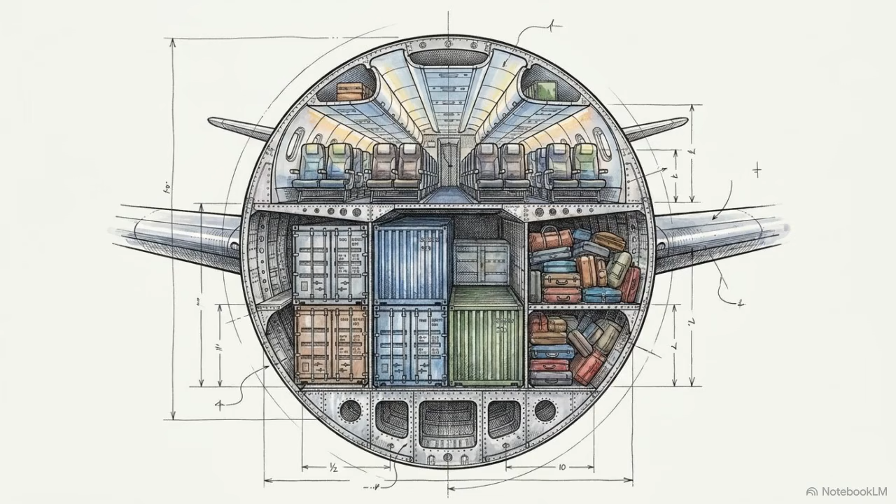In aerospace engineering, gravity is a strict accountant. Every kilogram added to an airframe subtracts directly from payload capacity or maximum range. When a commercial jet pulls off the tarmac, the materials it's made of dictate exactly how far it can go and what it can carry.

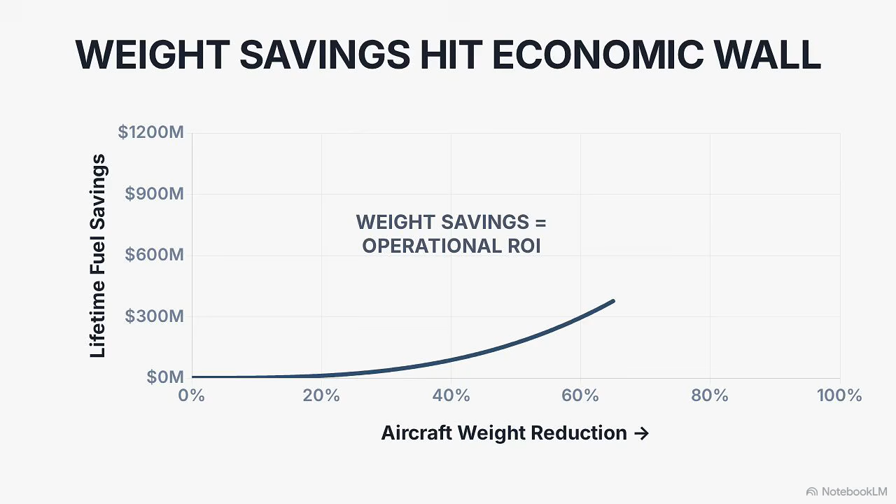This chart shows the exact economic formula driving all aviation design. As we reduce aircraft weight along the bottom axis, the lifetime fuel savings curve shoots upward. But there is a harsh reality waiting at the far right of this graph. If lighter is always better, why not build every plane out of the absolute lightest supermaterials?

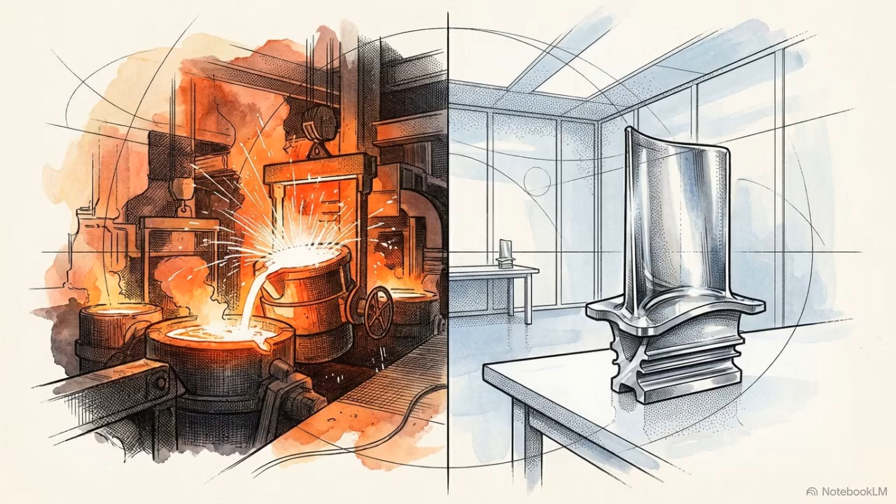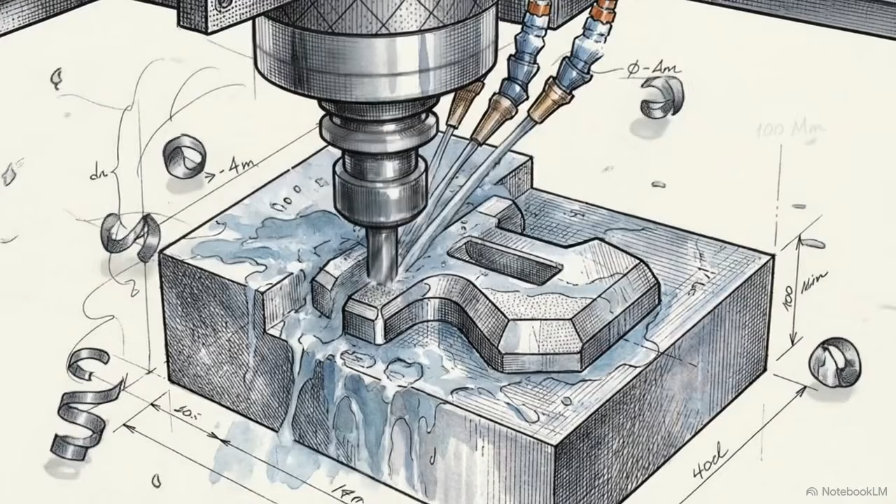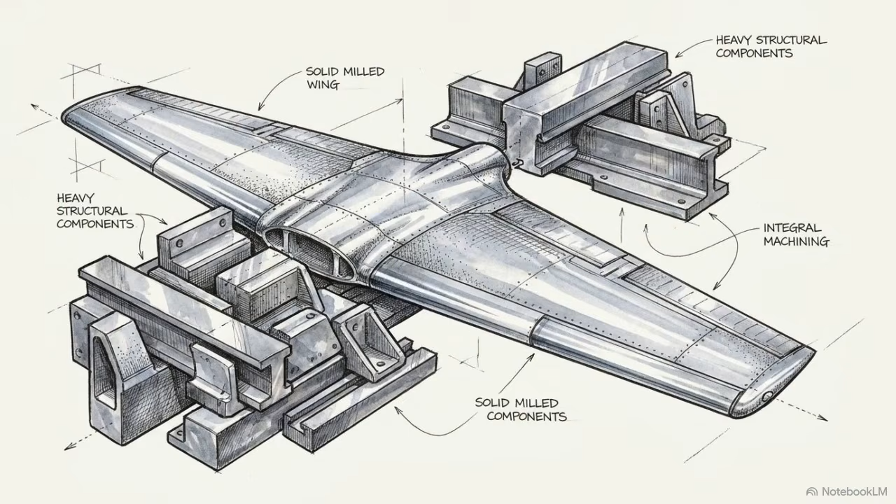The answer comes down to manufacturing reality. Material selection is a brutal, constant game of optimization. Engineers must balance the exact physical properties a part needs against the sheer cost of shaping, machining, and producing it at scale. When you look closely at modern aircraft structures, three specific heavyweights dominate this optimization game: aluminum, titanium, and advanced composites. Designing a successful, profitable airframe requires ignoring the search for a single, flawless supermaterial. It demands a highly strategic, mixed material portfolio, carefully placing each element exactly where it maximizes the life cycle return on investment.

For decades, the 2000 and 7000 series aluminum alloys have served as the highly reliable backbone of aerospace structural design. As you can see by the sheer scale of early assembly lines, we know exactly how to produce and work with it. These specific alloys offer a highly predictable strength-to-weight ratio. They are relatively light, quite strong, and crucially, the raw material is inexpensive to source and shape into complex geometries.

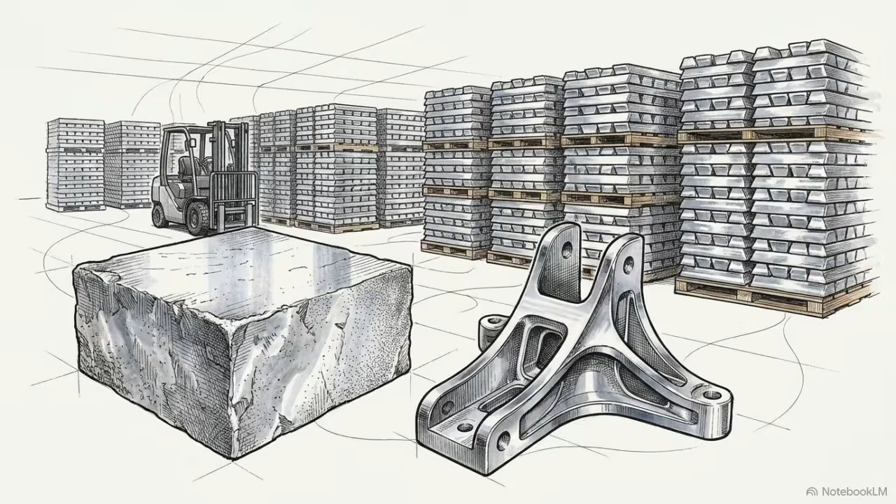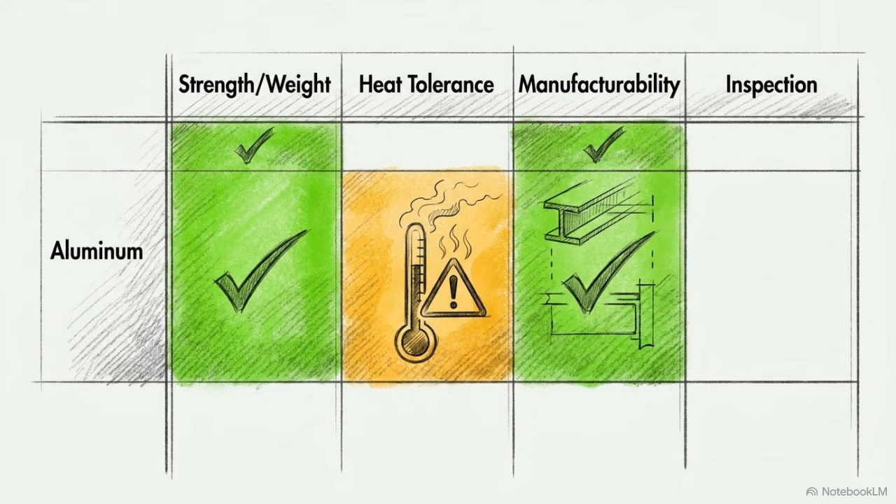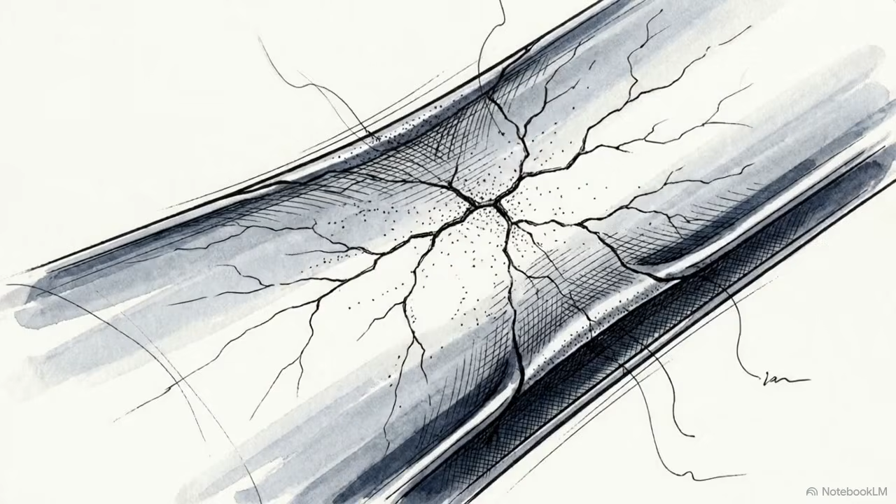This comparison matrix tracks how we evaluate material viability today. When we plot aluminum, it earns excellent marks for its reliable strength-to-weight ratio and its ease of manufacturability. However, aluminum has strict physical boundaries. If an aircraft component operates at elevated temperatures, like near an engine exhaust, aluminum rapidly loses its ability to retain structural strength. It also faces a long-term operational limit. Over thousands of pressurization cycles, aluminum structures inevitably develop fatigue cracking, requiring constant, rigorous visual inspection as the airframe ages.

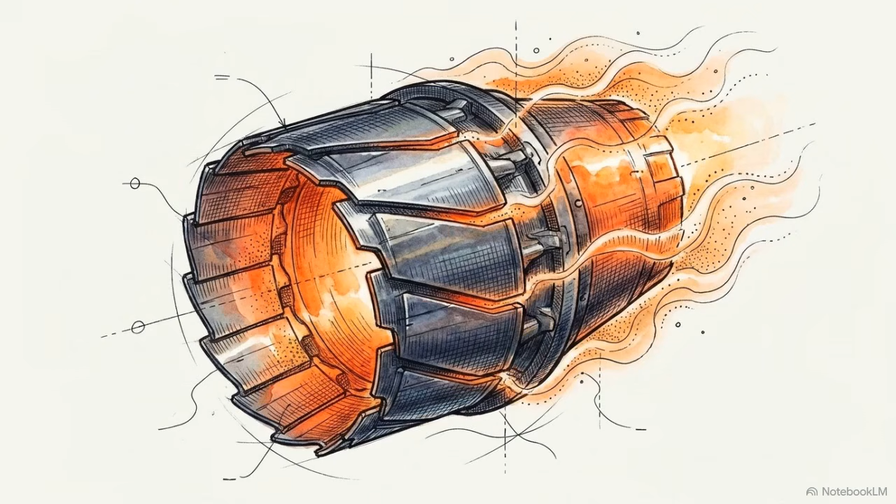When engineers encounter environments that exceed aluminum's thermal and physical limits, they deploy a highly specialized alternative: titanium. Titanium shines in extreme environments. It effortlessly survives the immense heat near jet engines, resists corrosion entirely, and delivers an elite structural density. On our matrix, its heat tolerance and strength profiles light up bright green.

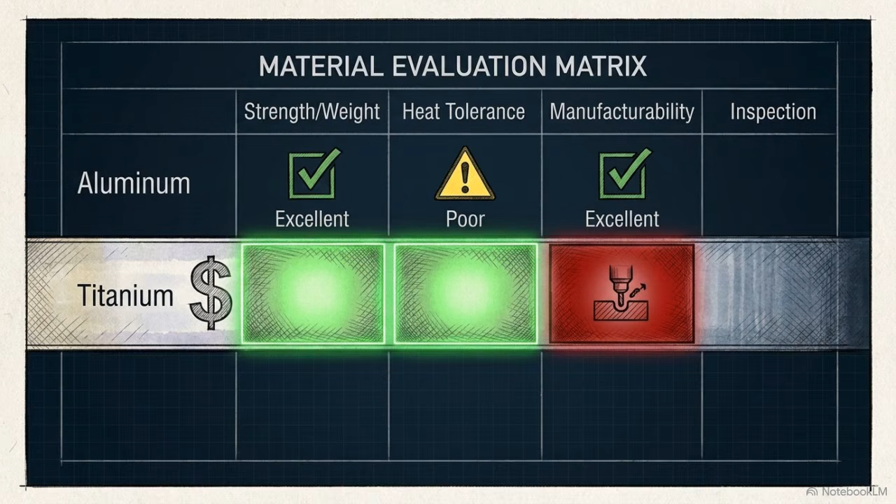That performance carries a steep economic penalty. The raw cost of titanium is astronomical, and its sheer toughness makes it notoriously difficult to machine, which drastically slows down production lines. Traditional metals provide a known, highly predictable baseline. We understand exactly how they behave, but their thermal ceilings and specific fatigue curves enforce a hard mathematical limit on how efficient an airframe can ultimately become.

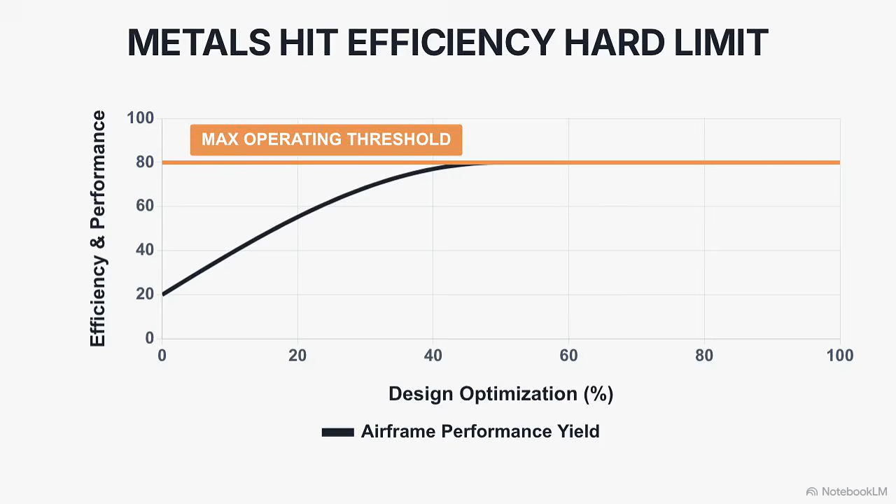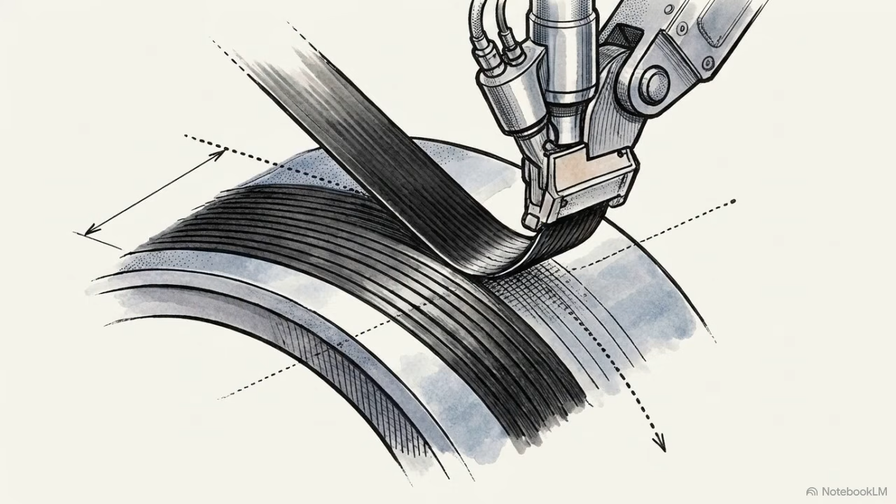To push past those metallic limits, modern structural design relies on carbon-fiber reinforced polymer, or CFRP. You often see it as the massive, unpainted green fuselage sections on modern assembly floors. Instead of pouring and machining a uniform metal, engineers lay down extreme strength carbon fibers in specific directions. If a wing bends upward during flight, they can align the fibers to provide strength exactly along that specific load path, shedding unnecessary weight everywhere else.

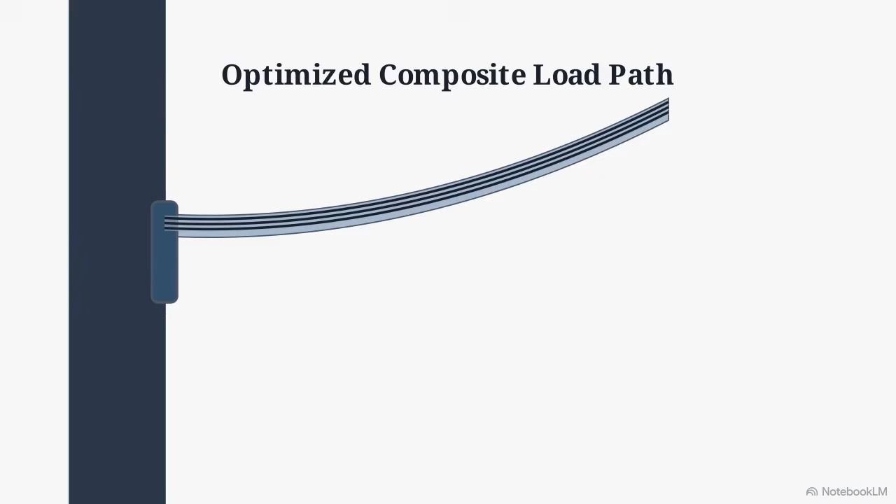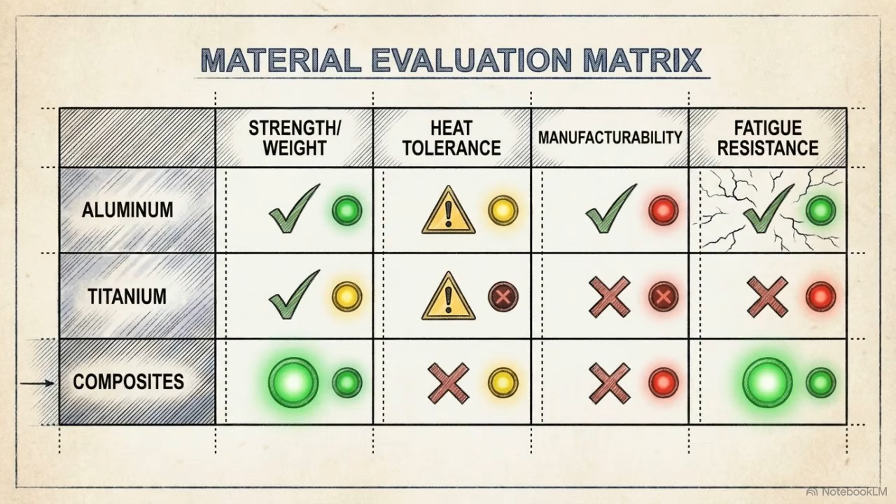Utilizing these composites in primary structures massively improves fatigue resistance. Because they are not metal, they simply do not experience the traditional crack propagation mechanisms that plague aging aluminum airframes.

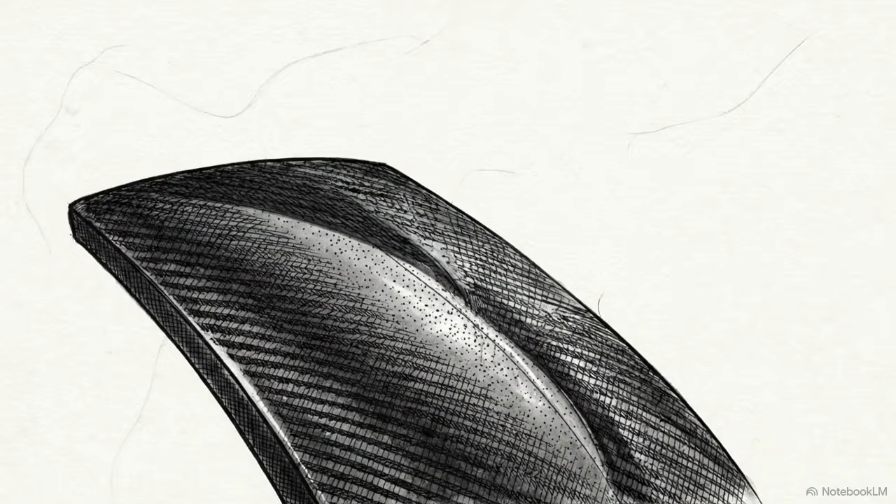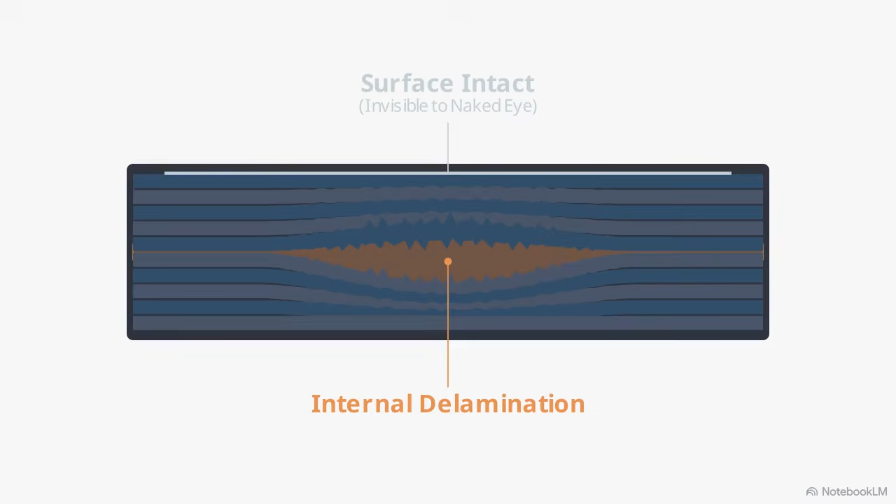But generating that strength requires a severe manufacturing bottleneck. The polymer resins that bind the carbon fibers together must be cured inside massive pressure vessels, holding immense, sustained heat for hours. Composites also hide their wear and tear. A dropped tool or a bird strike might leave the surface looking perfectly smooth, while causing deep structural delamination entirely invisible to the naked eye. This forces operators to rely on specialized non-destructive testing, like ultrasonic inspection, to verify the part's integrity. It's a heavy burden on both the manufacturing floor and the maintenance schedule.

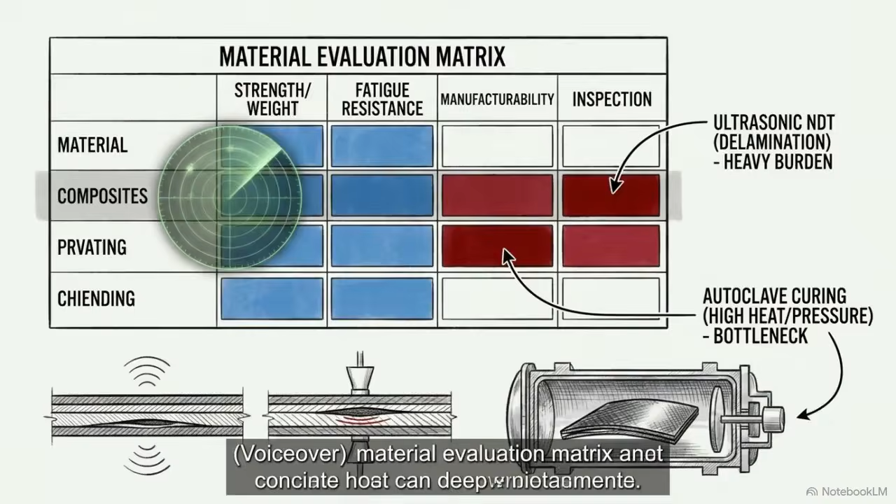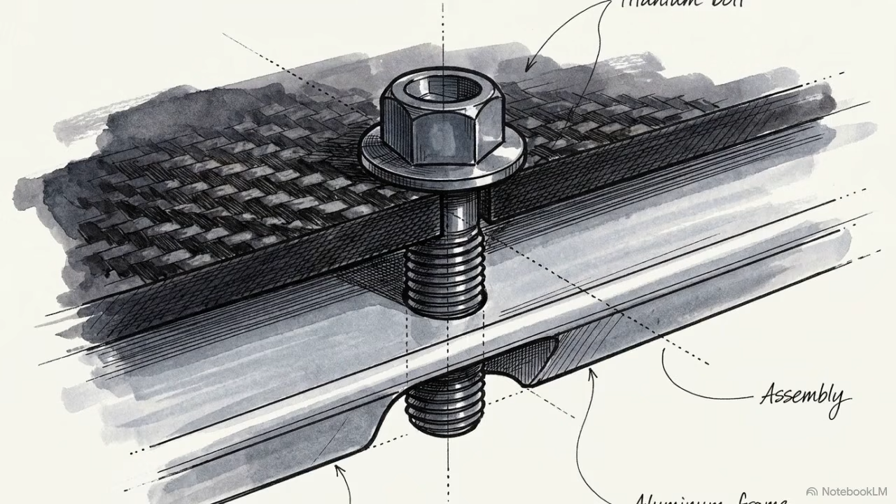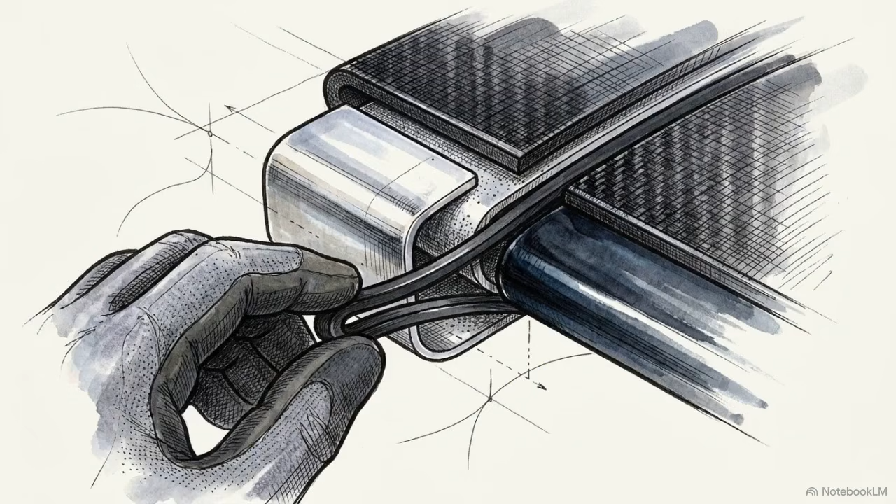Because of these costs, no commercial aircraft is built purely from one material. We combine metals and composites to balance the budget. But joining these materials creates a severe interface hazard. If you bolt aluminum directly to a carbon fiber panel, differing electrical potentials trigger rapid galvanic corrosion, aggressively eating away at the metal. Engineers spend considerable time mitigating this exact risk, designing complex isolation layers, creating physical barriers, and specialized coatings for every single junction point where dissimilar materials meet.

The immense operational weight savings of composite materials are very real, but they are only realized if an operator can afford the heavy upfront manufacturing friction and the demanding long-term inspection overhead.

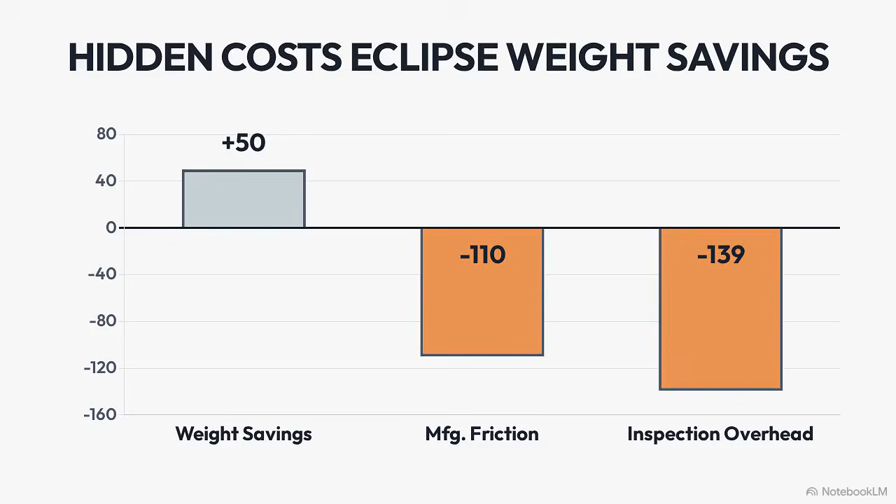So how do engineers actually navigate these compounding trade-offs? They start with the specific mission profile of the vehicle and let the primary engineering constraints dictate the material. This decision tree maps out the practical logic of modern aerospace design, branching out based on what the project demands most. If a project operates on strict margins, demanding established supply chains and straightforward visual inspections, aluminum remains the mandatory baseline choice.

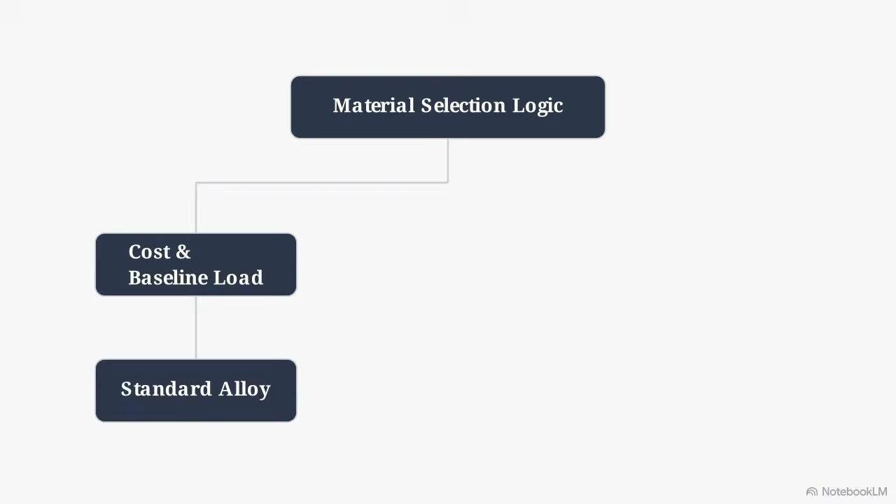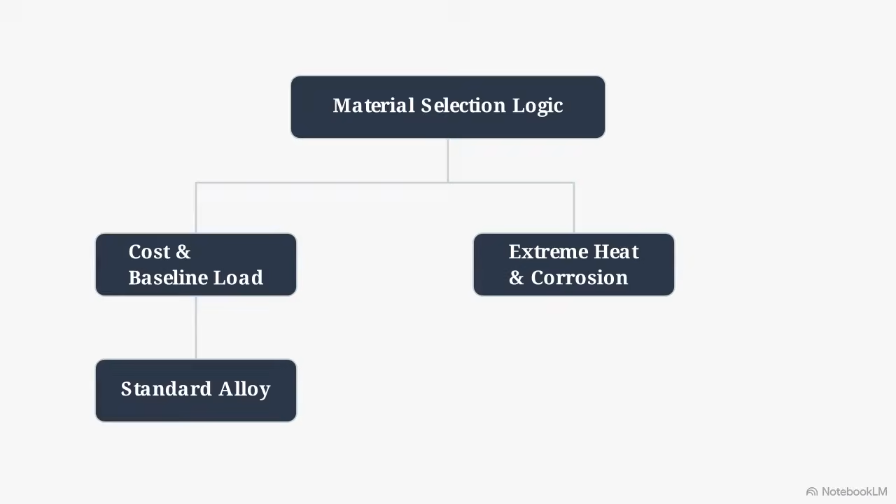If a structure faces massive thermal loads, like internal engine components or the skin of a supersonic jet experiencing severe air friction, you have to pay the premium for titanium and ceramic matrix composites. These extreme tolerances are even more critical for spacecraft, which face the added structural burdens of intense cosmic radiation and massive, violent temperature swings as they move in and out of orbital shadows.

Finally, if long-term fuel efficiency is your absolute highest priority and you have the upfront capital to absorb complex curing processes, advanced composites will yield the highest long-term return on investment.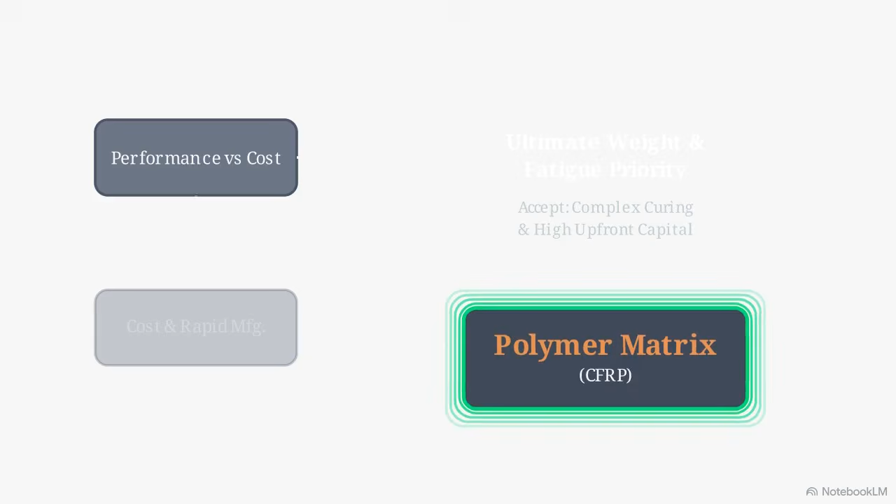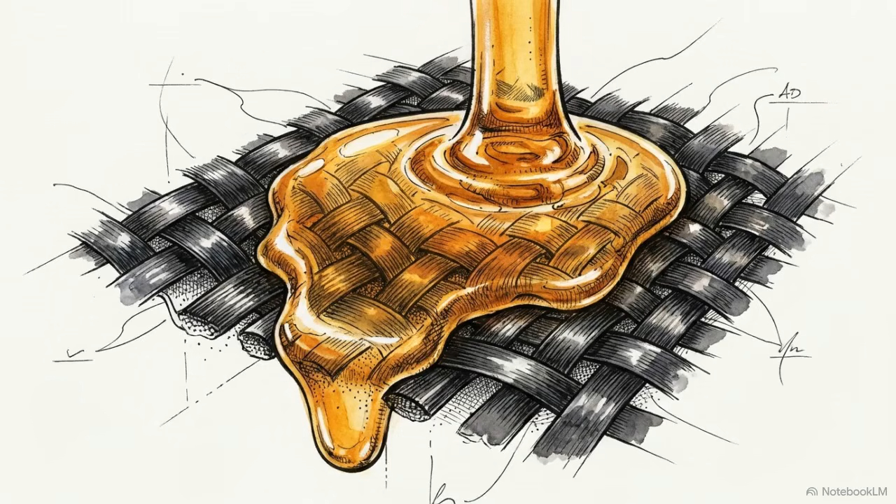But engineers are actively trying to break these traditional trade-off rules. Horizon technologies now include automated fiber placement heads that rapidly lay down precise composite structures, paired with new resin chemistries. These specialized resins allow for out-of-autoclave curing. By removing the need for massive pressure vessels, we can drastically lower the cost and time required to manufacture complex composite parts.

Aerospace capability is entirely dictated by material innovation. The future of aviation and the limits of how far we can fly will belong to whoever can shift the economic formula of manufacturing the lightest possible structures.